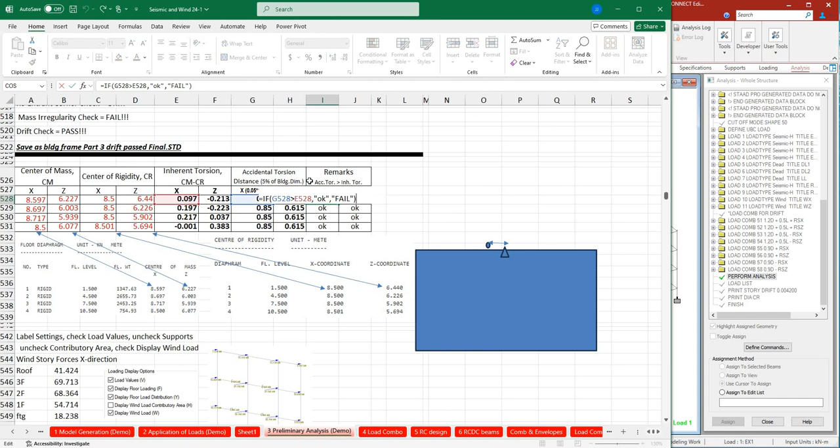Okay yan. So, this is simply a comparison of the difference and the 5% distance.

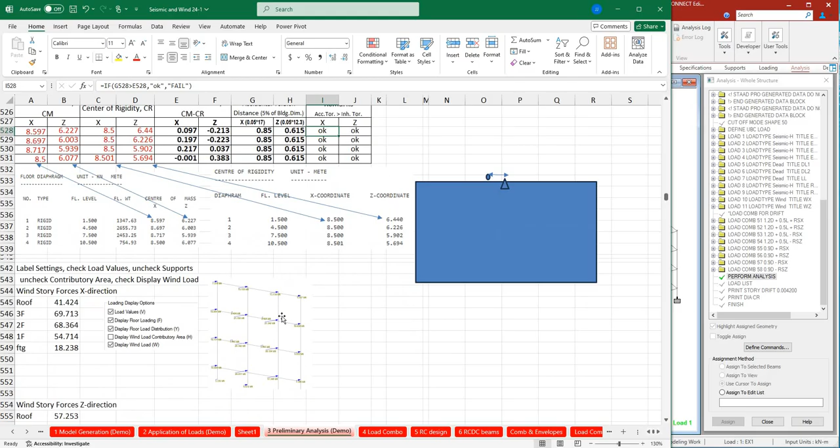Next, punta na tayo ngayon. I-extract naman natin yung wind forces. Okay? So, punta tayo sa STAAD. Sa view, punta tayo sa label settings, and then you check load values. Nandito yan. Ayun siya. You check load values and then uncheck supports.

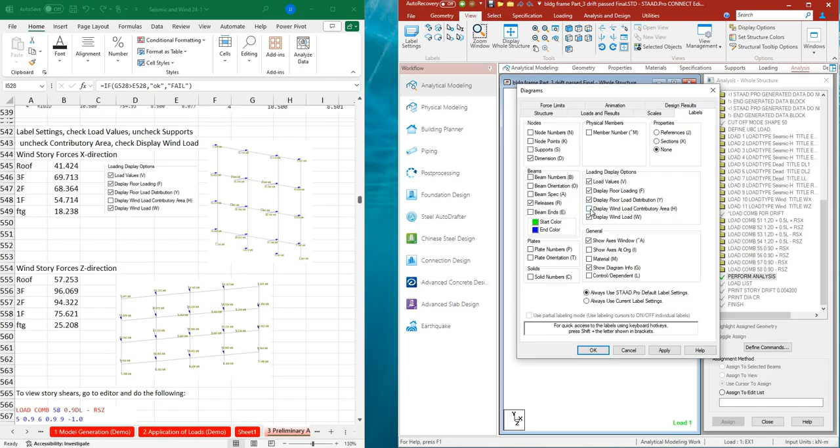Tapos uncheck contributory area. Ito yon. So, uncheck contributory area and then check display wind load. Ayan. So, naka-check na siya. Then, i-press OK. Tapos, punta tayo ngayon kay loading dito. By the way, check lang natin.

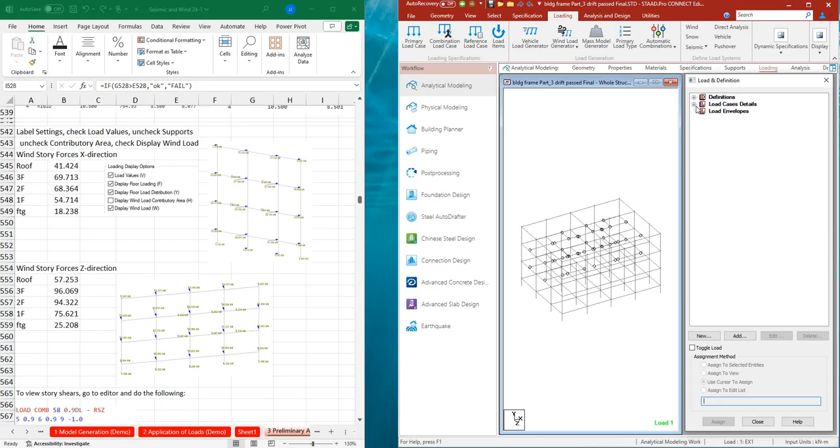Click mo yan si Analytical Modeling and then Geometry. Then, punta tayo kay Loading. And then, dito sa Load Cases, i-click mo si WX. Yan. And then, you also click WZ. Ito. Okay? So, pag-click mo si WX, ito yung wind forces. Take note na dito lang siya nag-a-act sa surface na yan. And it is in positive X direction.

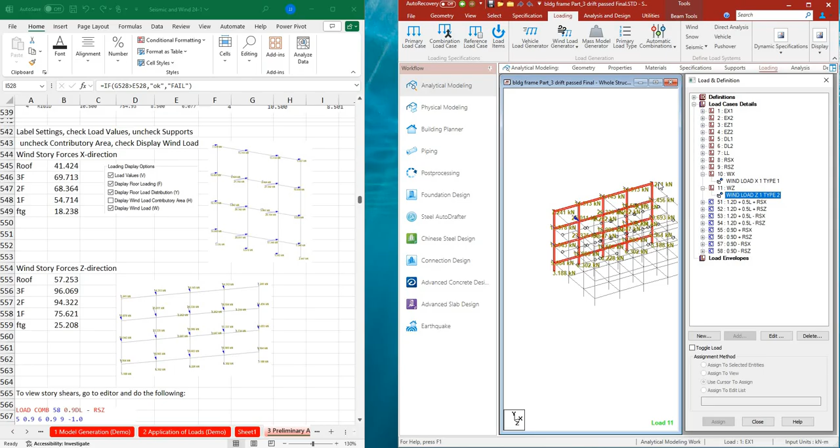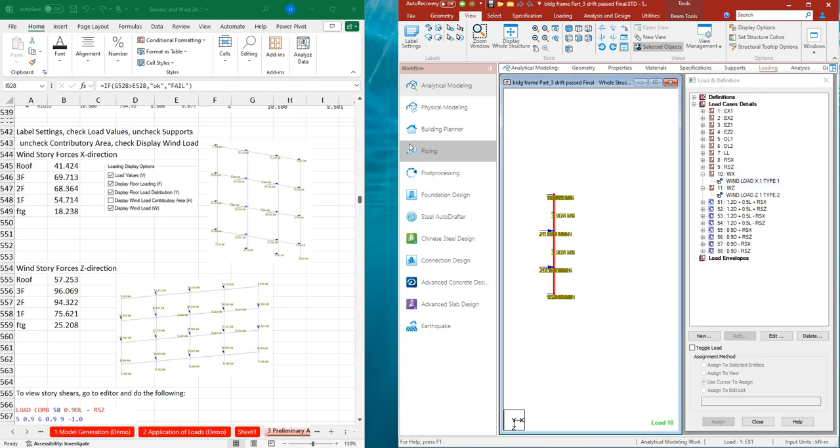And then, likewise, si wind Z direction, dito siya sa longitudinal dimension nag-a-act. Ngayon, i-extract natin si wind X. Yan. So, punta tayo ngayon ng top view. Kunin lang natin yan. And then, selected objects. So, palakihin lang natin ito. And then, ayan siya. Tapos, i-rotate mo na. Yan. Rotate mo, dahan-dahan.

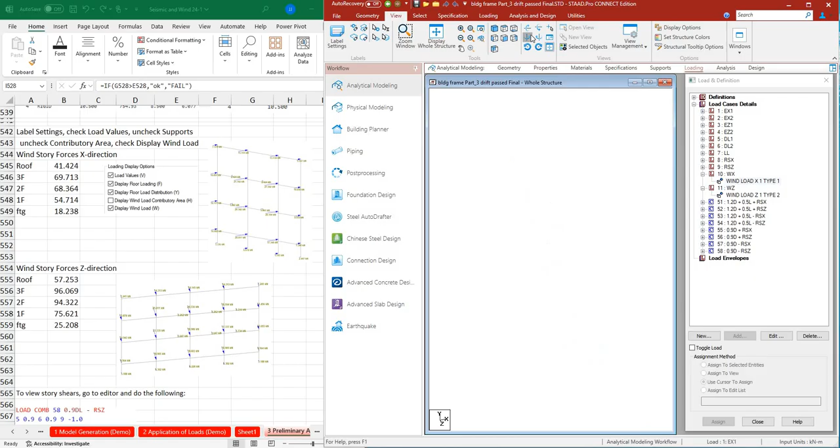Okay? So, next is, eto ngayon yung in-snip ko. And then, yan yung kinase ko dito. Something like that. Okay, next. At roof level, i-add natin ito. Yang 7.578, 15.155, tsaka yan. So, this is roof, and then third, second, and then first floor, and then meron tayo sa base.

Ngayon, bakit meron sa base? Okay? Take note na hindi naman exposed yung footing. Ginawa ko yan kasi yung ating earthquake, nakakonect siya dito sa baba. Okay? Pero ang wind naman, nag-i-start yung wind dito. Ngayon, isinali ko siya kasi parang mas malaki ang wind forces na papasok. Anyway, okay lang naman yun. We will just compare anyway.

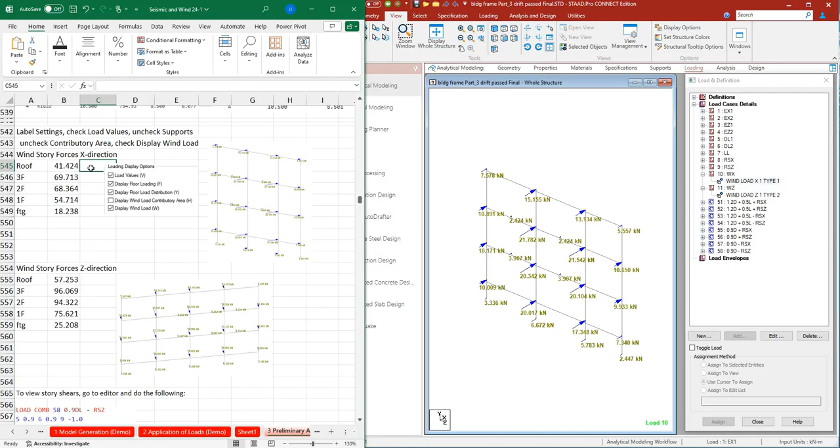So, let's add. So, that is equal to 7.578 plus 15.155 plus 13.134 plus 5.557. Yan.

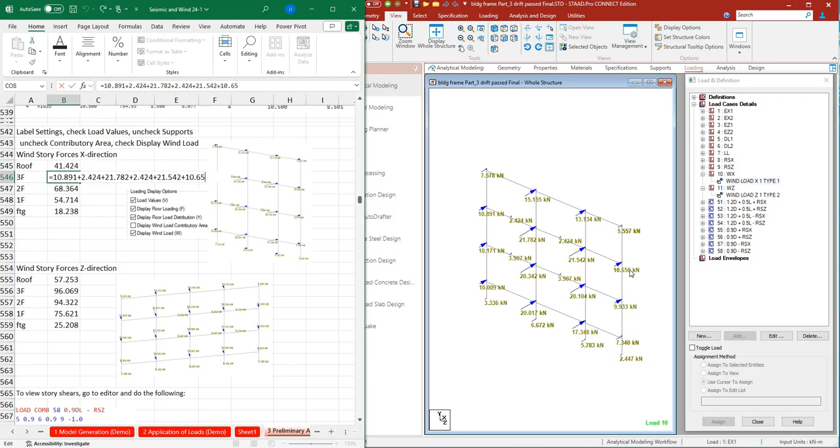Okay, next. Dito naman sa third floor, that is 10.891 plus, ayun, merong force dito. Dahil, take note na merong nakakonect dito na stringer. Okay, so that is plus 2.424. Then, meron ding nakakonect dito na stringer. Ayan yung 2.424. Tapos, 21.542 and then 10.65. So, same procedure dito sa second floor. And then, first floor, tsaka sa footing level.

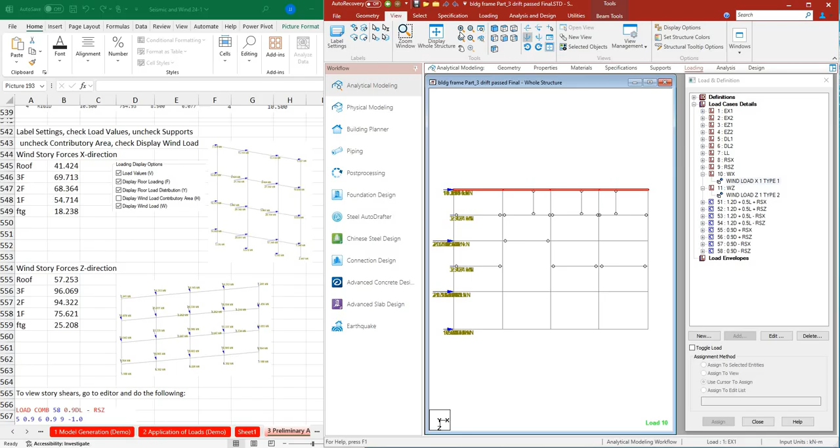Next, we do the same thing dito sa Z direction. So, punta tayo ngayon ng display. Top view, ito lang ang kukunin natin. And then, selected objects only. Tapos, dito tayo kay wind load Z. Yan. And then, yan naman ang i-snip natin. And then, pe-paste ko dito.

And then, likewise, yung roof level, this is wind story forces at Z direction. This is equal to 7.241 plus hanggang dun, 7.241 ulit. And then, up to the footing level.

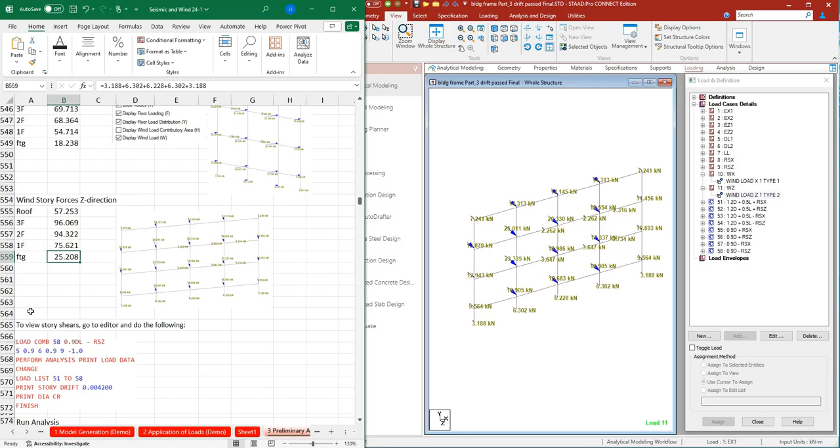Next is, kukuwentahin naman natin or i-extract natin yung story shears. So, punta tayo kay editor. And then, i-edit natin yung last lines. Gagayahin lang natin dito. So, perform analysis and then, let's say, copy ko yan. And then, ipe-paste ko dito sa ilalim. Yan. By the way, after finish, yung mga lines na nandyan, dinidisregard na ni STAAD. So, you don't need to put remarks here anymore.

So, load list, dito sa perform analysis, lalagyan ko lang ng print load data. Okay lang yan. Small caps, no? Tapos, tanggalin natin si load list. Palitan natin siya na change. And then, ibalik natin si load list. Tapos, print story drift, print DIA CR, and then finish. Okay? So, ito yung ginawa natin. Ginaya natin ito. Next is we now run again.

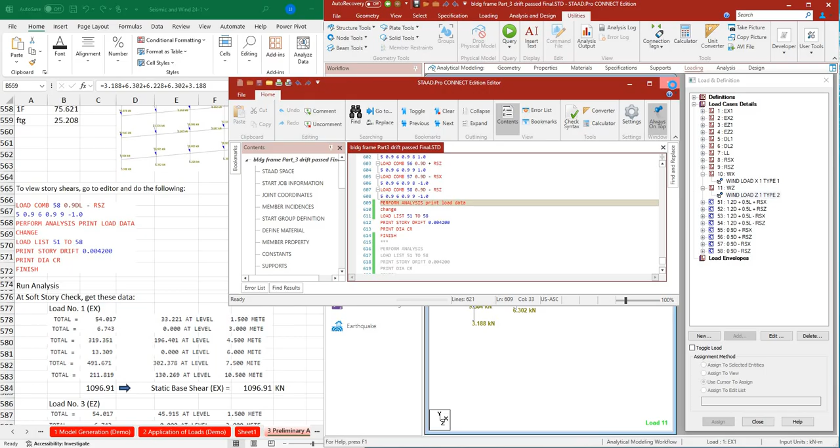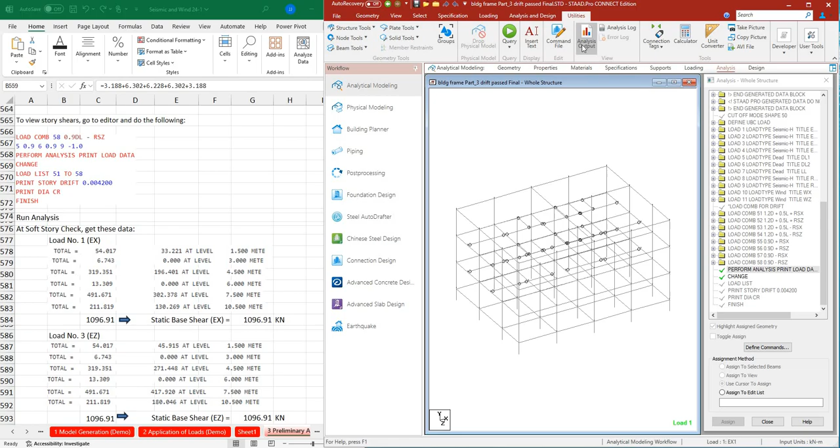And then, balik tayo sa analysis output. And then, punta tayo kay soft story. Dito. Double click mo yan. And then, after yan, punta ka dito sa load number 1, which is at X direction. And then, kunin mo yung total. Ito. Okay? So, total is equal to 54.017. And then, at level 1.5 meters.

Ito yung kinopya ko, no? Then, pinaste ko dito. Yan. Tapos, punta tayo kay level, ang susunod dito sa 1.5 is at level 3. Ngayon, ano tong level 3 na yan? Take note na meron tayong landing at mid-height sa first floor. So, 1.5 plus mid-height of 3 is 3 meters. So, ikokopya rin natin yan.

Which is ito, no? And then, susunod sa mid-height is yung second floor, which is at level 4.5. Scroll down mo lang. And then, ito naman ang kinopya natin. Paste ko dito, 319. And then, after second floor, meron na naman tayong mid-height. So, 4.5 plus 1.5 is 6. Ang copy natin, yan yung 13.309. And then, punta na tayo sa third floor, which is at 7.5 meters. Ito yun, no? So, 491.671.

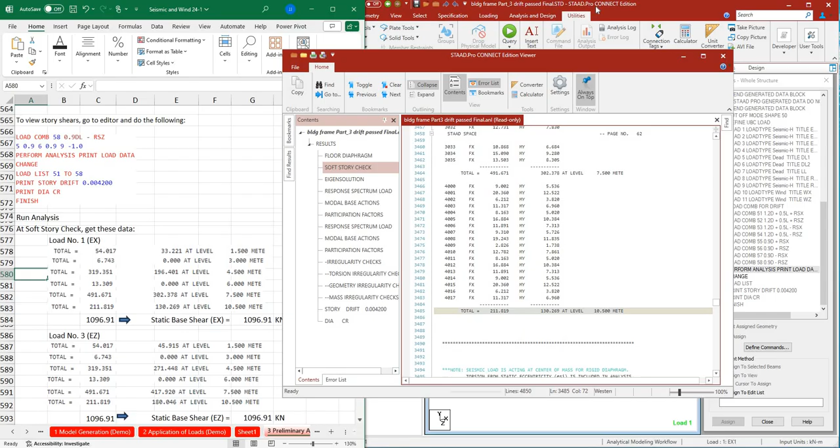And lastly, 7.5 plus 3 is 10.5, which is this. And that is 211.819. So, yan ngayon yung mga forces natin at X direction. Next is, dito muna, balik tayo dito. I-add natin lahat ito. So that is equal to 54.017. Oops.

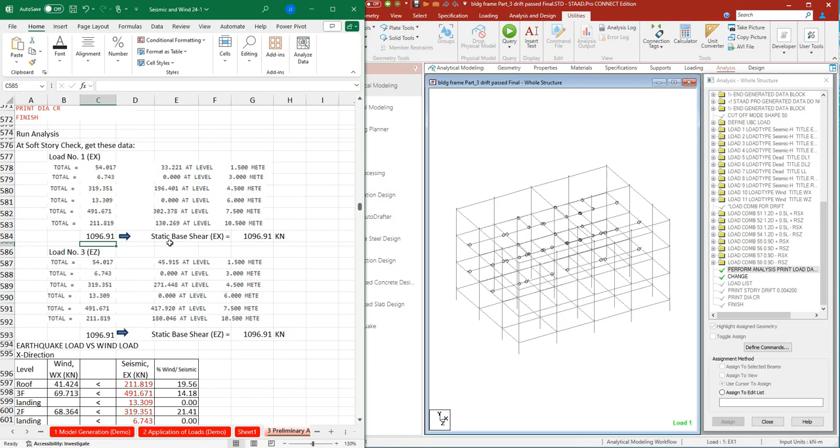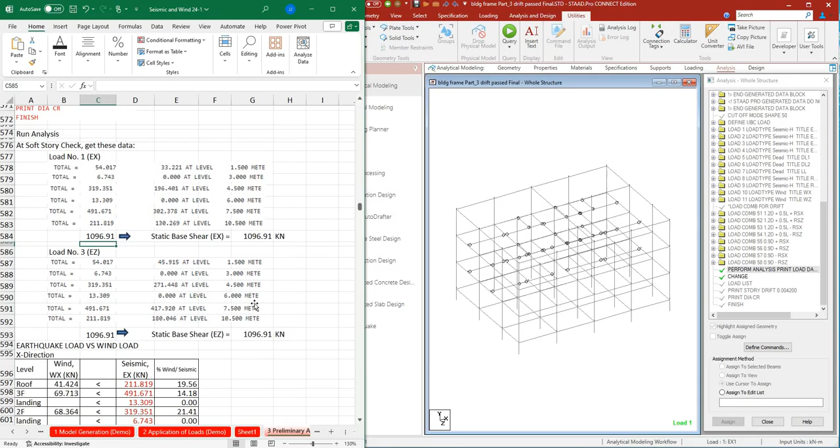Ayan siya. 54.017 plus 6.743 plus 319 hanggang sa 211.819 is equal to 1096.91. And this happens to be our static base shear na EX. Take note, ang static base shear, kinocompute yan based on the weights. Okay? Kaya, if based on the weights, yung weight mo, hindi yan magbabago in X or Z direction. So, parehas sila. And then, dito naman sa Z direction, so balik tayo kay

analysis output, contents, soft story check, scroll down mo lang, and then, dito tayo kay direction Z. So, that is after 10.5. Ito na siya. So, load number 2 is Z direction. Punta tayo sa level 1.5. Ayan. So, negative 54.

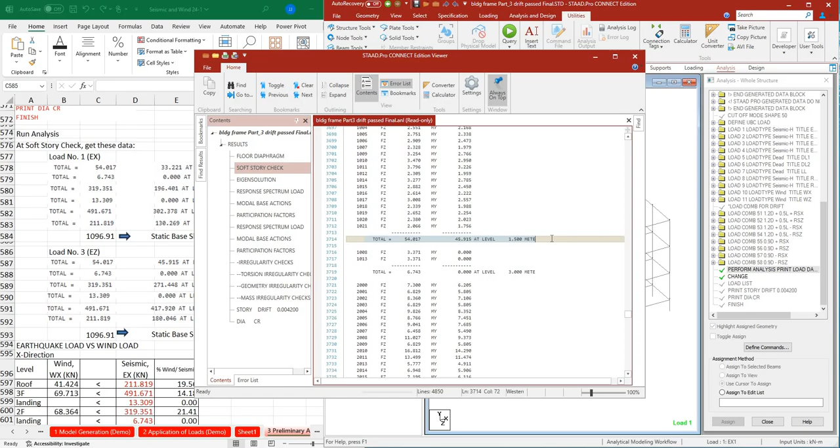Oh, sorry. Load number 2 pala is negative X direction. So, punta tayo kay load number 3. Sorry. Dahil Z direction tayo, no? Yan. Load number 3 is Z direction. So, ito ang kukunin natin. Ayan. 54.017. Ito siya. Followed by at 3 meters, 6.743. And then, 4.5 hanggang sa 10.5 level, 211.819. Likewise, kunin mo rin yung total niyan.

Now, let us compare. Tapos, dito naman, ang in-extract natin ay yung static base shear, 1096. At bakit hindi ko ginamit yung response spectrum RSX? No? Kasi yung RSX, that is 900 plus something lang. No? So, mas conservative na, dito na lang tayo mag-compare.

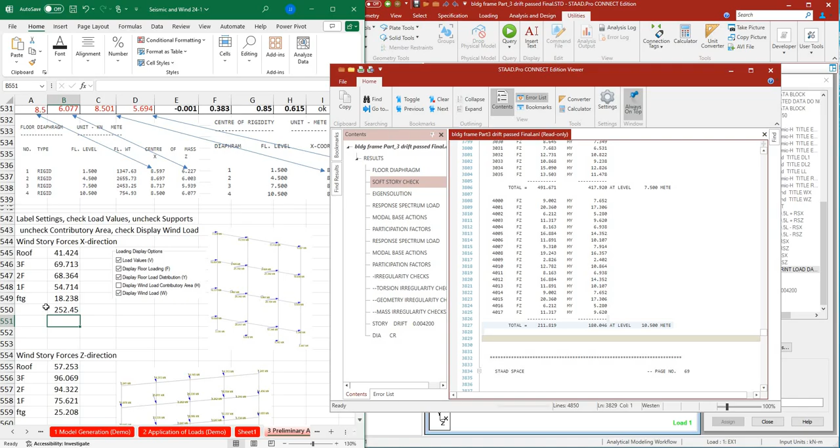Okay, dito sa Excel na yan, sa spreadsheet na to, ang roof level 41.424 nanggaling yan dito. Okay, so this is at X direction followed by 69, then 68, then 54. So, ayan, 69, 68, and then 54. Ito yung earthquake load versus wind load in the X direction. And then, dito tayo ngayon sa, take note, this is 252.45. So, yan yung total nito, no? So, sum. Ayan. Likewise, meron din itong sum. 348. Ayan.

At roof level, dito tayo sa X, ang total story shear is 211.819. Ayan. Followed by 491.671. Followed by 13.309. And then at 4.5, this is 319.351, and so forth and so on. So if you will add this, it is also 1096.91. Ngayon, i-compare natin itong dalawa. So yung seismic versus wind, mapapansin nyo na mas malakas ang seismic. Okay? Pero pagdating sa footing, medyo mas malaki ng konti itong wind. So, okay lang yan. Then, sa Z direction,

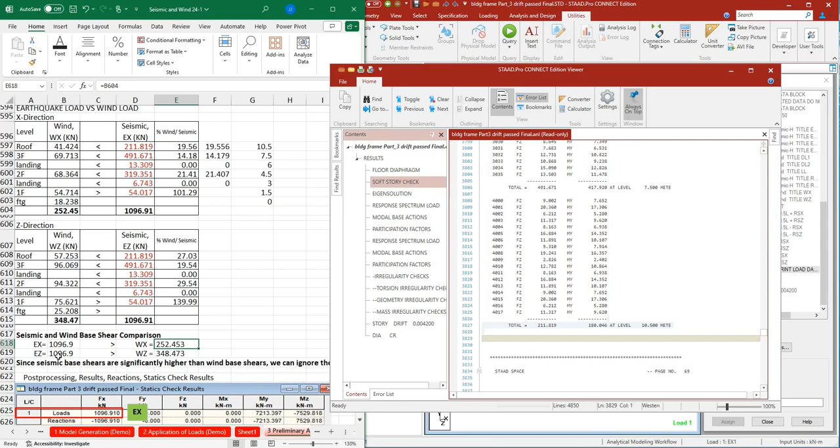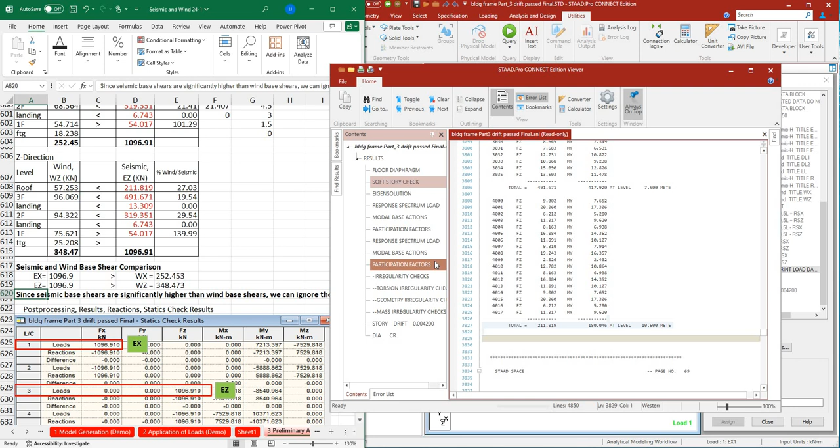Seismic and wind base shear sa X direction, 1096. And then, yung wind, X direction, 252. Yan yung total. Tapos, sa Z direction, ang wind mo, 348. So, mapapansin nyo na mas dominant pa rin ang seismic forces. So, since seismic base shears are significantly higher than wind base shears, we can ignore the wind load in the design. So, meaning, hindi na natin isasali ang WX, WZ sa mga load combinations.

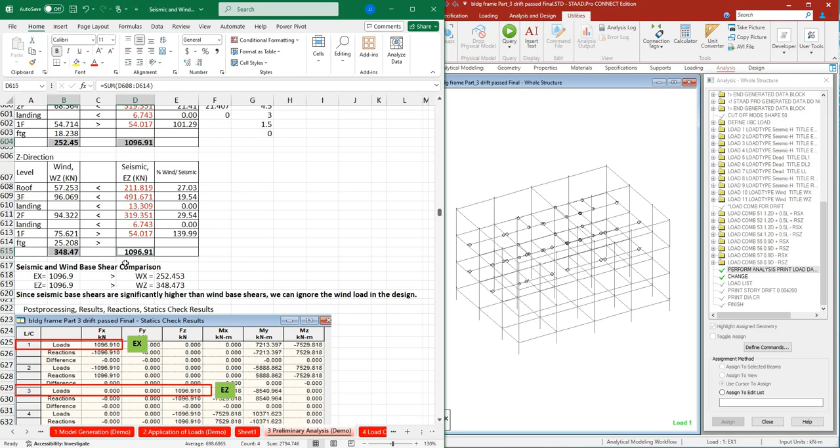And then, to verify these numbers, ayan, ito, tsaka ito. To verify these numbers, punta tayo ngayon kay post-processing. So, dito, post-processing, okay, and then go to results. Tapos, reactions, and then statics check. Ito siya. Tapos, scroll down mo lang yan ng konti. And then, hanggang sa load 11. Okay, so, copy-paste natin siya. And then, paste natin dito. So, dyan ko kinuha ito.

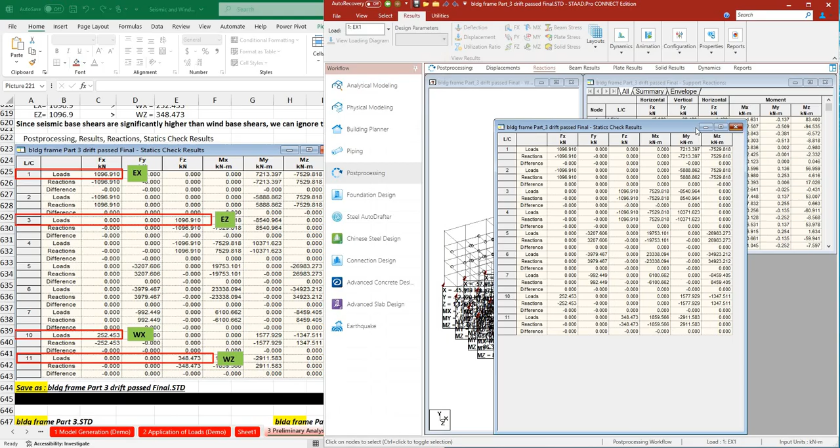Ngayon, itong load case number 1, this is positive X. Papakita ko lang kung ano yung mga yan. Punta tayo kay analytical loading. Ayan, no? So, load case number 1 is positive X. And then, load case number 11, which is ito, yan yung wind Z. Okay? Take note na after 11, mga combinations na yan. So, hindi na to load. Hindi na yan kasama dito. Okay? So, ang kailangan natin dito, load case 1, X, tsaka Z.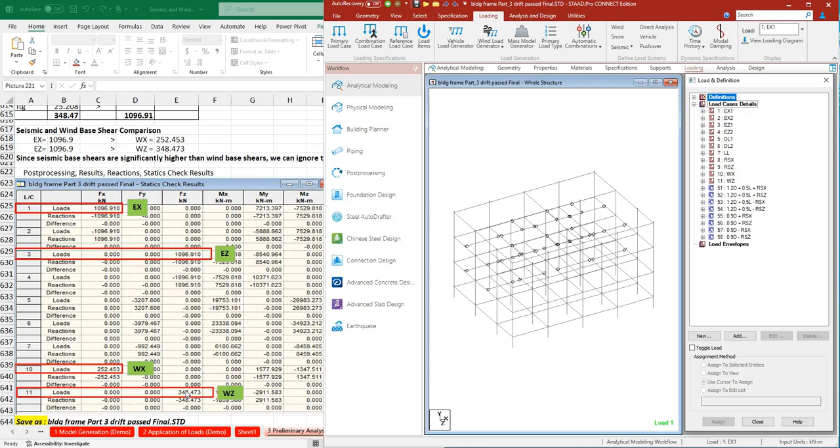So, yung F sub X, so this is in X direction, ayan ang load, 1096. Tapos, ganun din dito, number 3, 1096. And then, punta tayo ngayon kay wind X. This is load case number 10. Ayan siya. F sub X, that is the load. And then, 11, wind Z. Ang F sub Z naman, loads pa rin yan, 348.473, which is, yan, mga numbers na yan.

Okay guys, so you save your work. Save as building frame part 3, drift passed final.

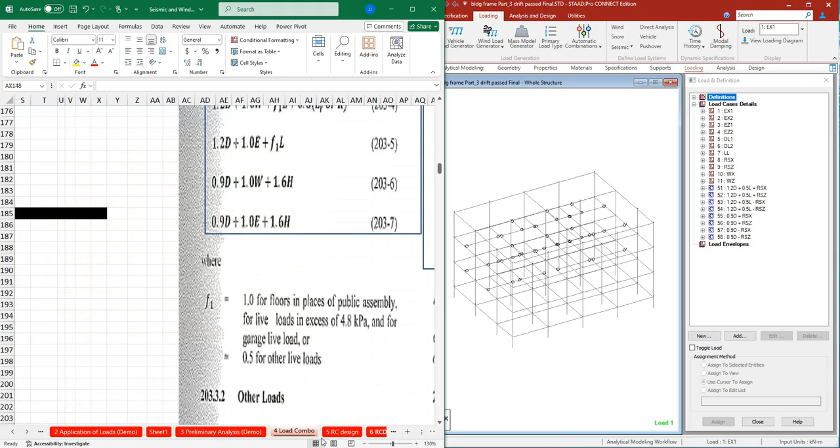Ang next na topic dito ay load combinations. Dito, ang nagawa nating load combinations ay 51 to 58. This is for drift only. Hindi pa kasali dito ang design combinations.